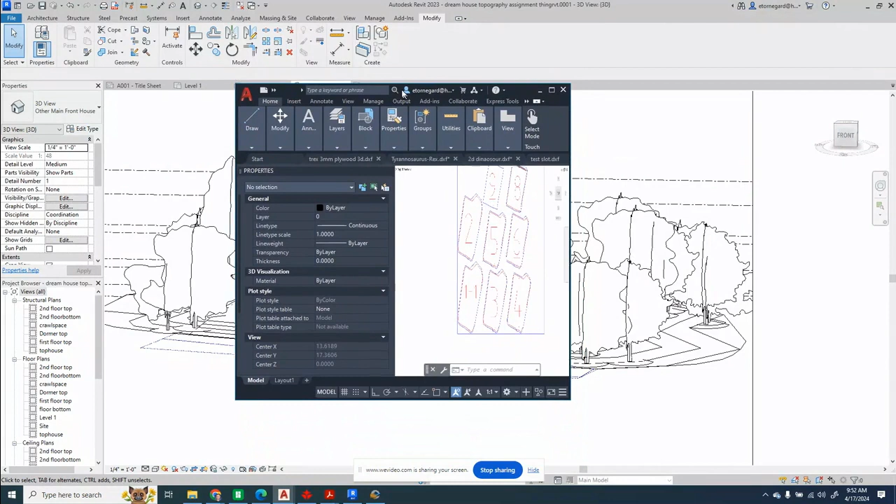This video will demonstrate how to extract a topo surface from a Revit model and create a laser cuttable DXF file similar to this to represent the different contour intervals on your model that could be then cut out and glued together in sequence, kind of like a 3D printed model of your topo surface or topography for your physical model as part of marking period 4 project.

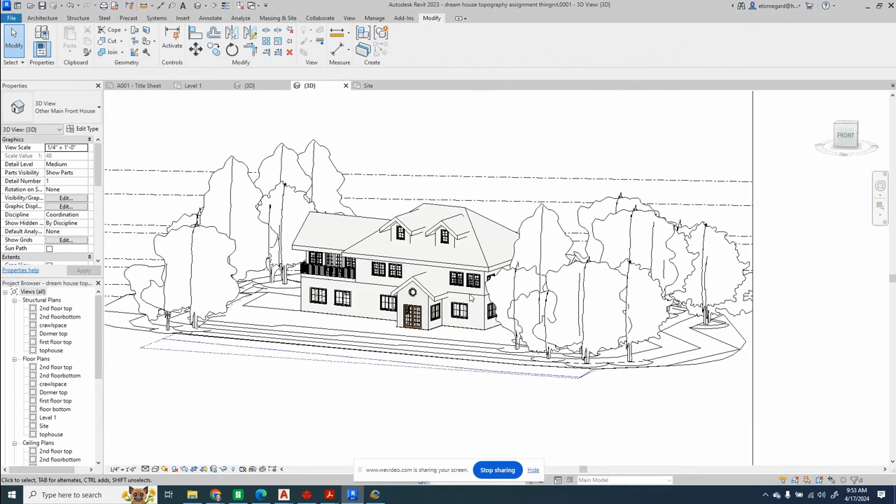So to jump right into it, here's a sample house with a topo surface. First thing I want to do is isolate the topo surface so I don't see any other elements such as trees, walls, and roofs. So I select the topo surface by clicking on it once, and I come down here to the glasses button. I'm going to select isolate element. Now it's isolated on its own.

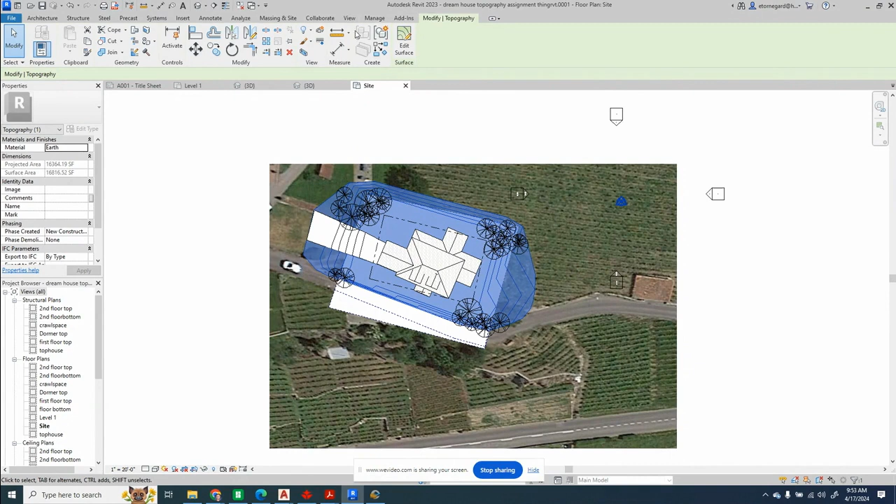Next thing I did is I went to the site plan and I measured the size of this topo surface so that I know the real world size of it. I went to a top view in site plan, so I double clicked site plan under floor plans, and then I went to the modify menu and clicked on the ruler, and then clicked on the 2 points across and see that it's about 200 feet long.

Now I know the size, the real world size of my model. Let's continue with the prior step. So write that down somewhere so you know how big it is. Yours might be different, but I measured the biggest dimension of mine, which was about 200 feet.

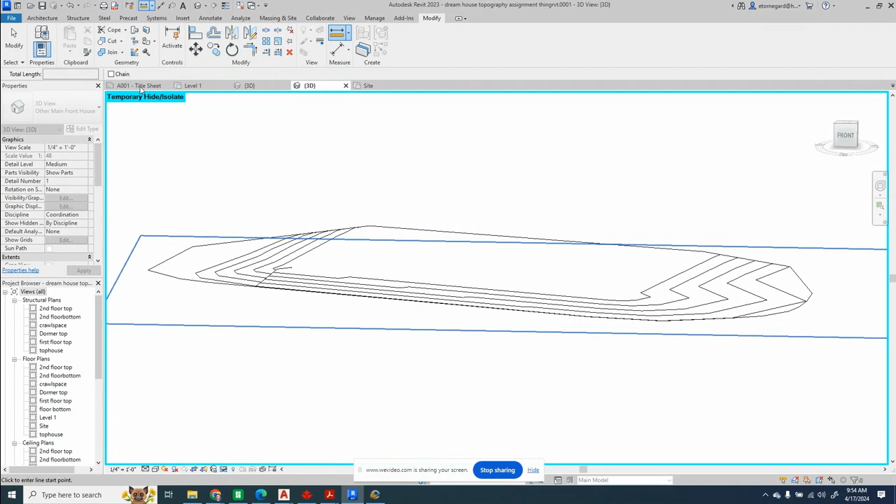My next step is to export this. So once I have the model selected and isolated, like I just showed you before, click on the File button from Revit, Export, CAD formats. We're going to select an OBJ file. That's an object file, similar to if you were to 3D print something. They ask you for a resolution. Medium is fine. I would use feet and inches as the default measurement.

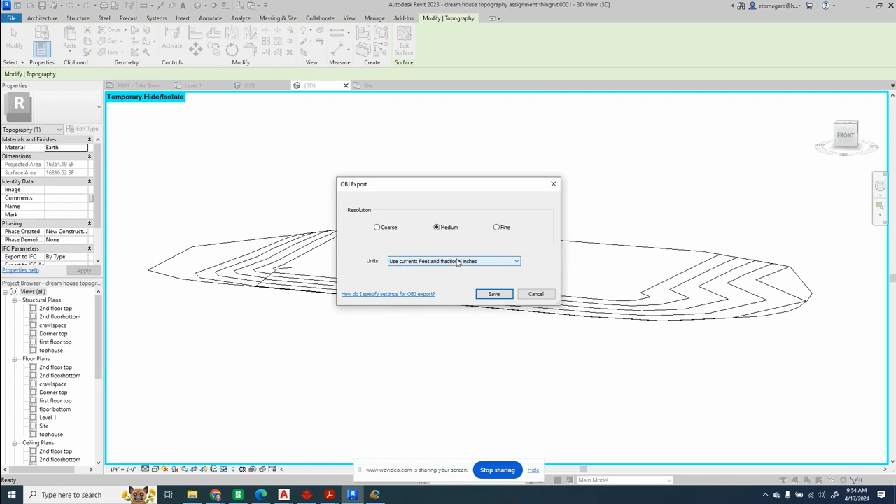Hit save. Now, the save window pops up, so now you need to pay attention to where you're saving this. I suggest, like always, save on Google Drive. I've already saved it, so I'm going to skip that step. So once you've exported the file, you need to go to a new program that we haven't used before called Slicer. So in your start menu, you should find a program called Slicer for Fusion 360.

So you can go ahead and open that, which I already have open here, and then you can go ahead and import your model. So you would select File, Import, or Open, which I already have, so I'm going to skip that step, and just look for the OBJ file. Again, pay attention to where you saved it. I put mine in my documents, but I would encourage you to use Google Drive.

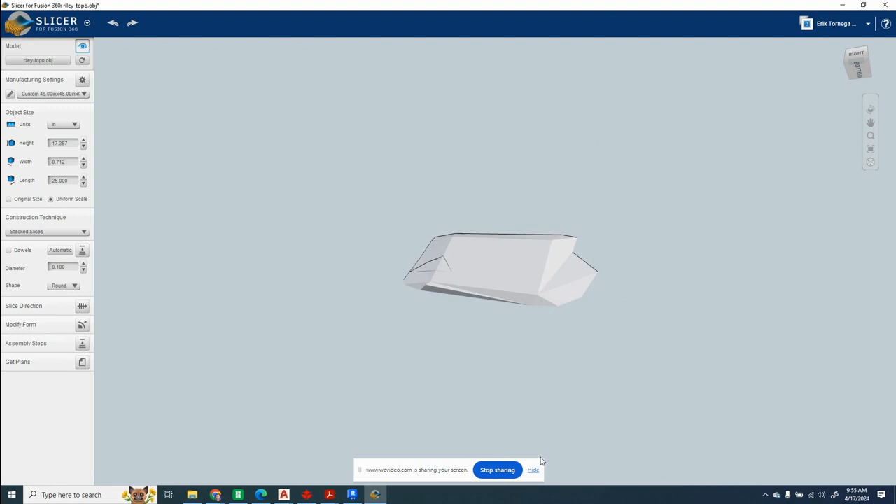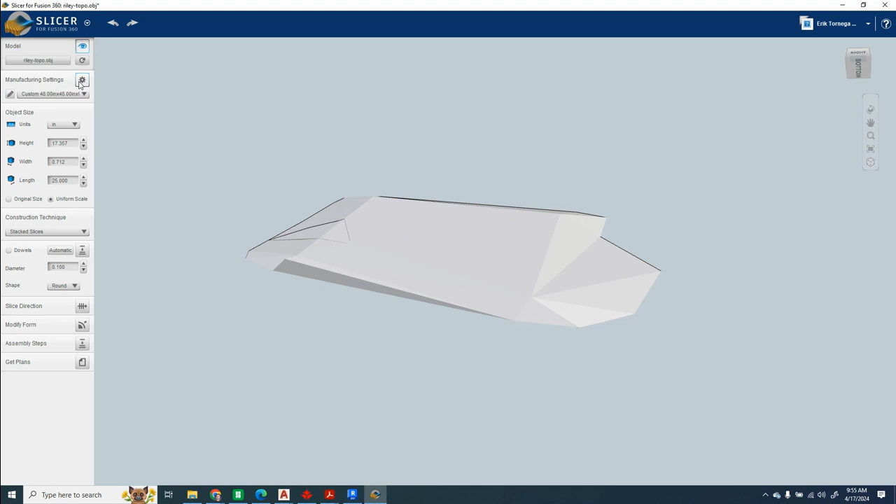Once you've imported it, you can view your surface: right-click, hold the right mouse button, and move your mouse around, and you can see your surface. Now we need to set up the parameters for exporting this to create the 2D patterns like I showed you earlier for AutoCAD. There's a number of steps. First thing is, if you click on this manufacturing settings button here, this brings up some options on the bottom here.

So first thing you want to do is think of your material size. So the material represents what you are actually going to cut this from, such as plywood, cardboard, maybe plastic, etc. So you need to know the size of that material so you can measure that with a tape measure or ruler. I just picked 4-foot square, which is 48 by 48.

And then the thickness is super important. Ideally, the thickness will match these different intervals of your model. So the steeper your model is, such as if you're modeling a cliff, you may need a thicker material versus something that has a very low slope to it. You would need maybe a thinner material in order to actually see that slope.

In other words, if you have a very gradual topo surface that does not have a lot of elevation change, if you want to show that it's a topo surface and not just a flat surface, you're going to need some thinner material, maybe even paper, to glue on top of each other in order to get these different layers to show. So that's what those boxes are for down here. These last two you could ignore.

Next thing is the object size, so the actual model. These numbers here are in inches. When I brought this in, this was my actual size. So this said 200 and something before. So I scaled it down to my actual model size. What I did is I just typed in the actual maximum length here. And the way I figured that out, I went to a calculator here.

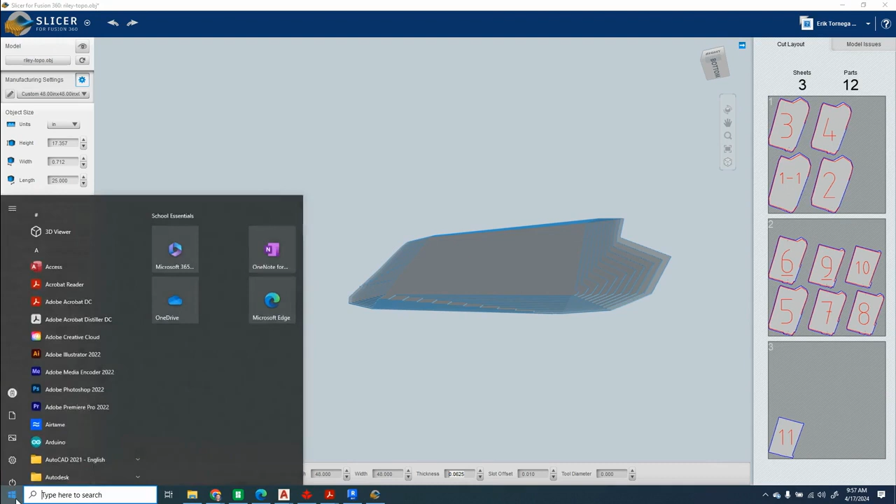My model was 200 feet long. If I multiply that by 12, that becomes 2,400. So that's the real world size, 2,400 inches. That's obviously way too big to model for our purposes, so we're going to have to pick one of the standard architect scales. If I wanted to make this 1/4 inch equals a foot, if I divide this by 48, that means the base of my model will be 50 inches, which is still pretty big. That's almost 4 feet.

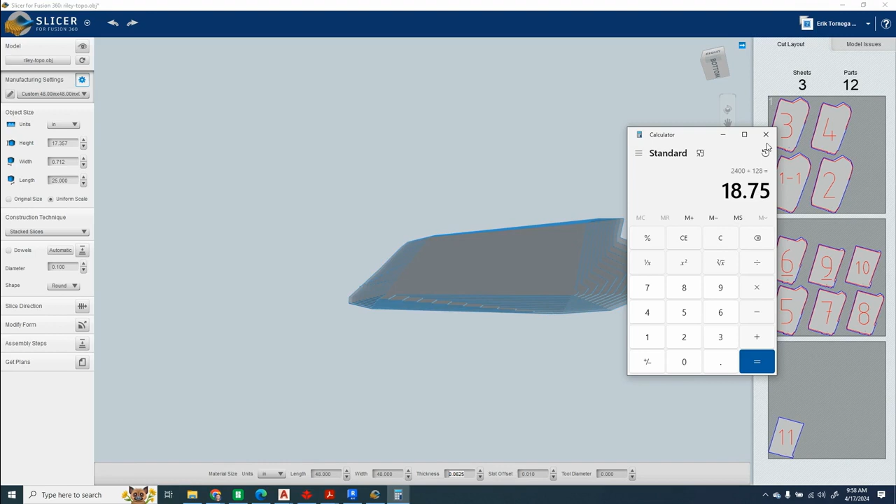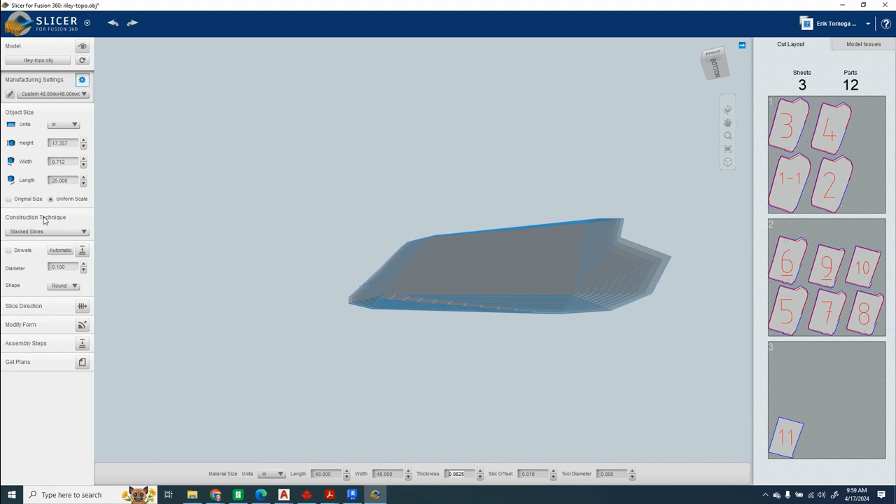So I picked 3/16 of an inch equals a foot, which gave me my overall length of about 25 inches. So I just changed the length to 25, and the height and width automatically adjusted because I have the uniform scale option checked off. Once your size is determined, this is probably one of the most important pieces, because if it's way too big, you're going to have a ton of slices, or it just won't be manageable to make.

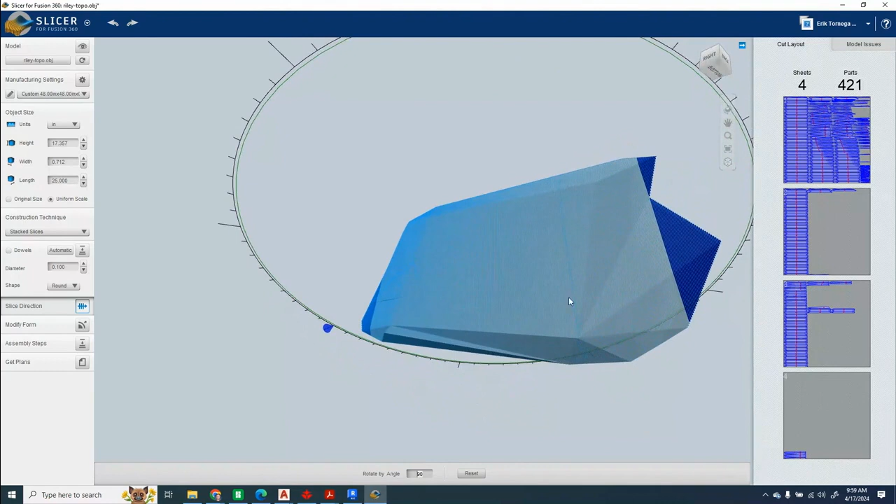Now you have to change the slice direction. This is a little confusing, because by default, it slices. I set this back to 0, this is to 90. You can see now it has vertical slices here. And if you look at the preview here, it's a lot of slices. You're slicing through it vertically here. So instead, if I rotate this back to 0,

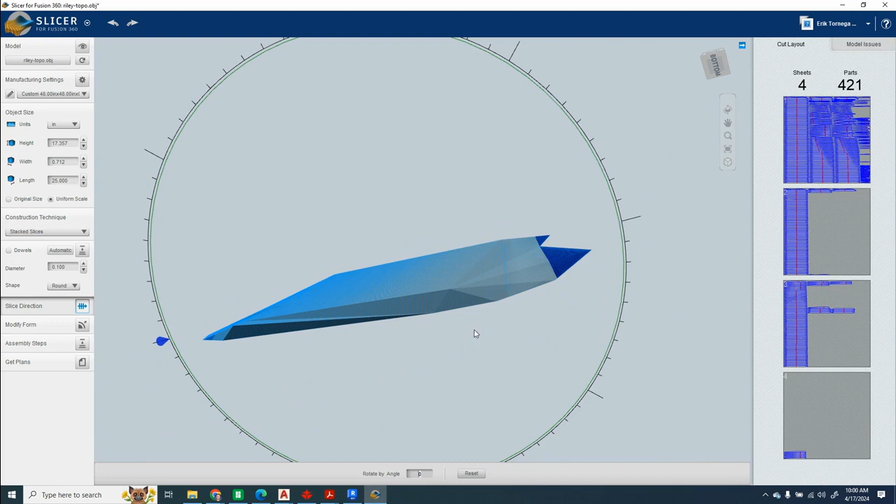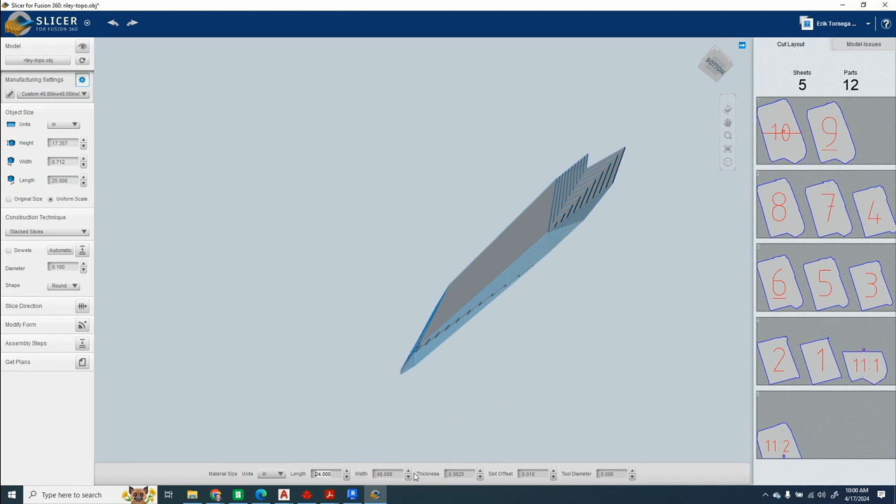you select the ring that you want to rotate on, and usually rotate it by 90, you can see that in my preview now these slices actually make sense. So you can see the preview of how many slices I have here based upon the settings I have for my material size. If I were to make this 24 inches, for example, you see now my material size changed, and I need more materials. So you can play around with that, see your teacher for help on that as needed.

Now, once I've confirmed all these things are correct, I'm going to hit Get Plans. Under Get Plans, this shows you the same preview you saw before. I'm going to select File Type Export as DXF. I'm going to leave it in inches and export to my computer. Again, this comes out as a zip file, which is a compressed file. So I exported mine, and I have this slicer folder here that I created under my Documents folder.

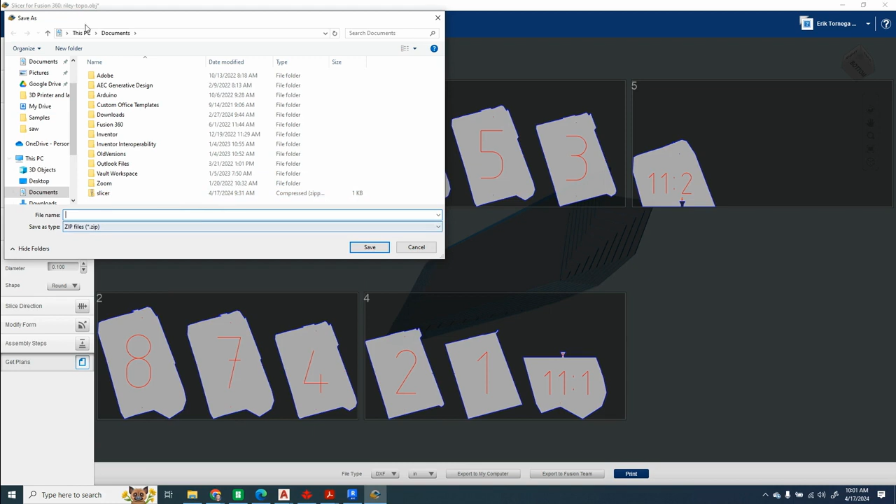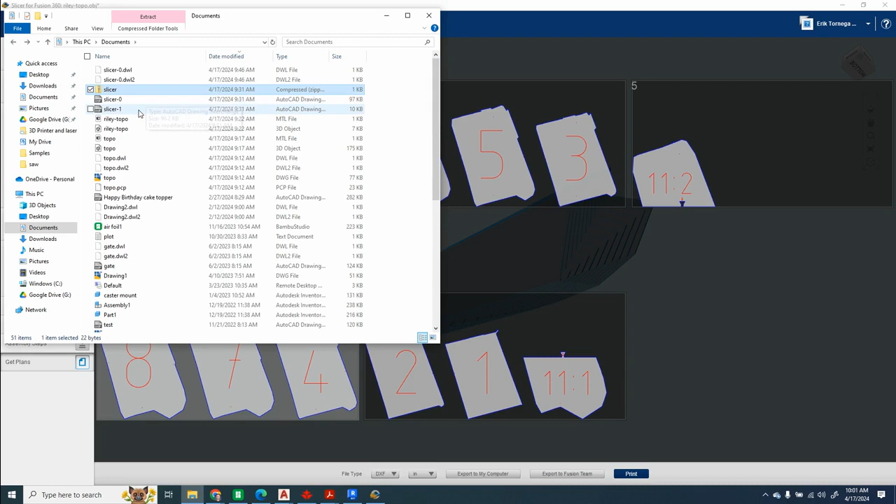Once that folder is created, I went inside that folder and opened it up. There were 2 files in here. I copied them, Control-C, and then pasted them outside of the folder to unzip them. Now I have 2 AutoCAD files. Each of them represents the different pages. So if I open up the Slicer 1 file here and bring AutoCAD into view, you can see now I have the DXF that I could then export to RDWorks to laser cut these different profiles out. And there's 1 file for each of the different pages that was created. And that's a wrap.